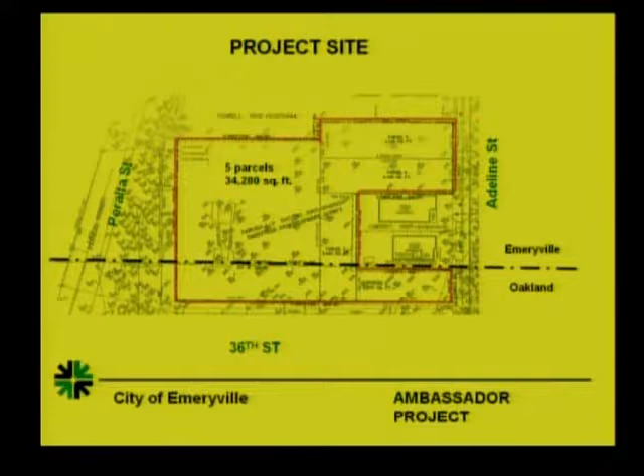This is going to be an affordable project, as in the earlier cases. This time it's 75 affordable rental units, more or less equally divided between 1, 2, and 3 bedrooms.

So the way the site has been designed is that the 3 parcels which stand by themselves, 2 on Adeline and the one at the corner, will have townhouse type units. They'll be 3 bedroom, so there'll be 5 of these right here. The major site...

...that was occupied by the former Ambassador building will be occupied by parking. Most of the site is going to be occupied by parking. They're also going to have lifts, so the entire parking will be accommodated at this level. The garage entries will be from 36th Street. The lobby to the project will be on Peralta, right here.

Along Peralta, these units, shown in blue, the applicant is looking for an option to make them live-work, flex space, or residential units. Right behind it, you have mechanical areas and equipment, and bike parking at this corner right here. There's also a small management office, as this is going to be a rental project.

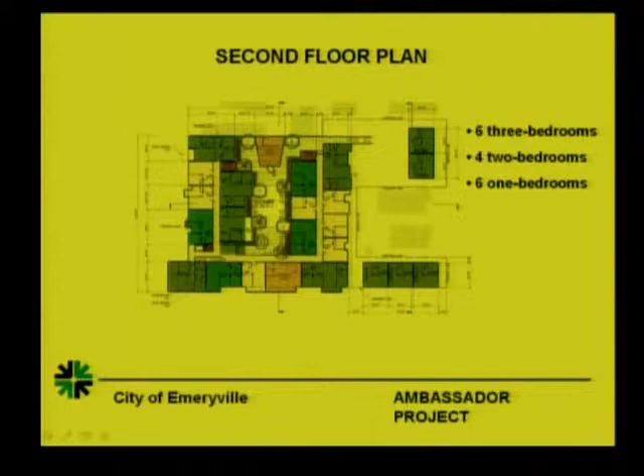So it's a podium kind of building. You have a U-shaped court around which the units surround it. Most of the units facing the court tend to be the larger ones, 3 bedrooms and some 2 bedrooms. There's also a community room here and an open space area right here as well. So it goes up to 4 levels, and all 3 mix of units occur at all the levels.

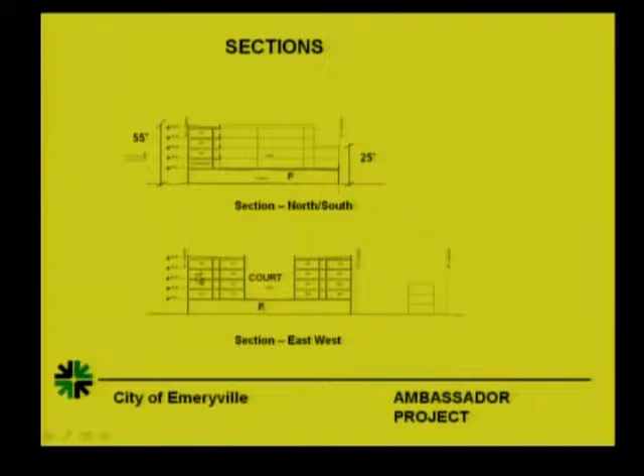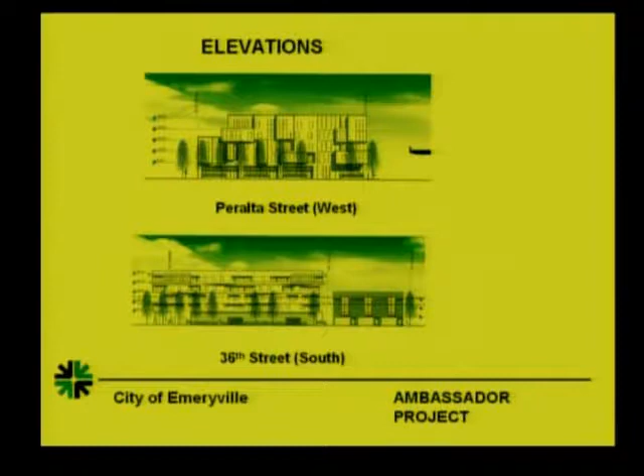This is the east-west section, you can see the court and the surrounding units. I'm going to quickly go through the elevations here, and let the applicant describe in detail. Since the submission of the plans, they've done a little bit of additional work in terms of materials and designs, colors, as well as the massing.

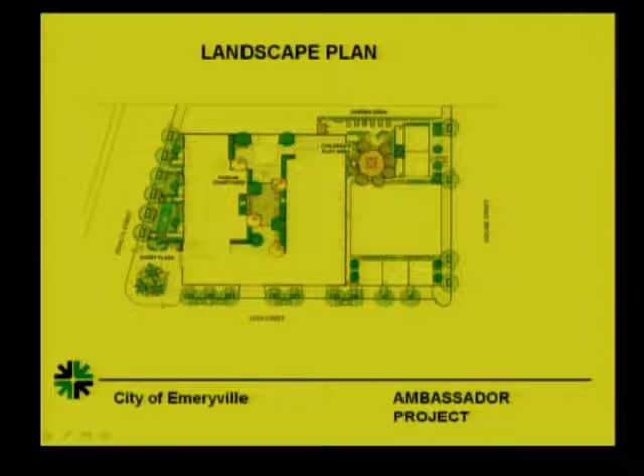In terms of conformity to zoning regulations, it is in the CG, General Commercial District, which has no prescribed density. The proposed density is 96 units per acre. To put this in perspective, Adeline Place, recently constructed, is at 120 units, and Andante is 63 units. Most of the city, under MU and IL district, has a density of 75 units per acre. The building height maximum is 40 feet, which can be increased to 55 feet with a use permit, and the highest portion of the proposed building is 55 feet.

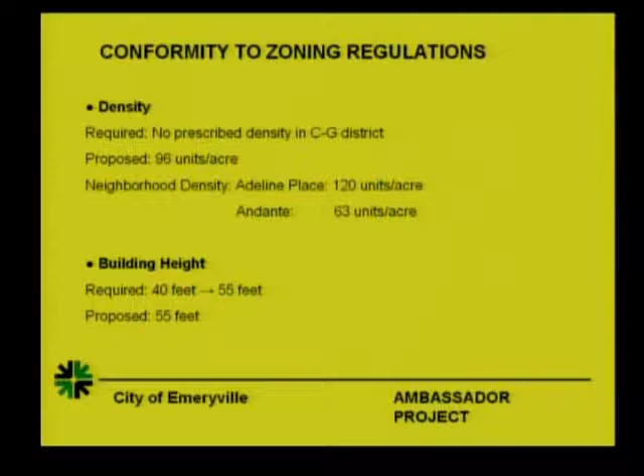In terms of parking, both resident and guest parking meet city requirements. What this project needs is a parking variance, which was also in earlier incarnations of this project. The reason is these garages along Adeline and along 36th back out into the street, and the zoning ordinance does not permit this for projects with more than 4 units, mainly because of potential hazards moving into oncoming traffic. Kimley Horn is preparing an updated traffic study for this project. They had done that in the earlier case, but they're updating it due to a slight difference in unit count, and will also look at the potential hazard from these garages.

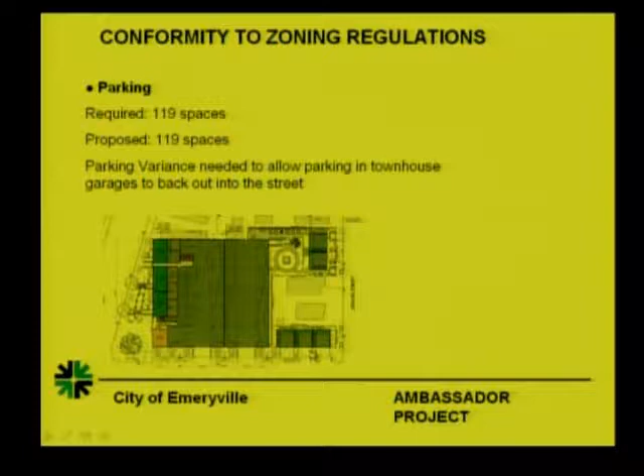We are hoping that this project will come to you before the new general plan is in effect. However, the project does comply with the density, height, and floor area proposed in the draft general plan.

I'd mentioned that this is an affordable project, and the affordability levels would be the rents, which are between 670 to 830 for 1 bedrooms, going up to 1100 for 2 bedrooms and 1160 for 3 bedrooms.

This was reviewed internally by staff, and the main comment was that the landscape area, the entry plaza, be designed as a community garden similar to the one existing across the street. This also came up in the community meeting. There was also a suggestion to include bulb outs on Peralta as well as West MacArthur to slow down traffic. The other recommendation is that the townhouses, particularly along Adeline Street, have a 1-car garage instead of 2 cars to minimize the driveway width, with the shortfall perhaps accommodated in the main garage.

The RCD held a community meeting last month on the 17th. About 10 people attended, including Councilmember Davis, and there were a lot of clarifications that members asked for. In terms of suggestions, they wanted to make sure there was some vertical landscaping, and they also felt there was a need for shadow studies so they could see the impacts of shadows on their properties.

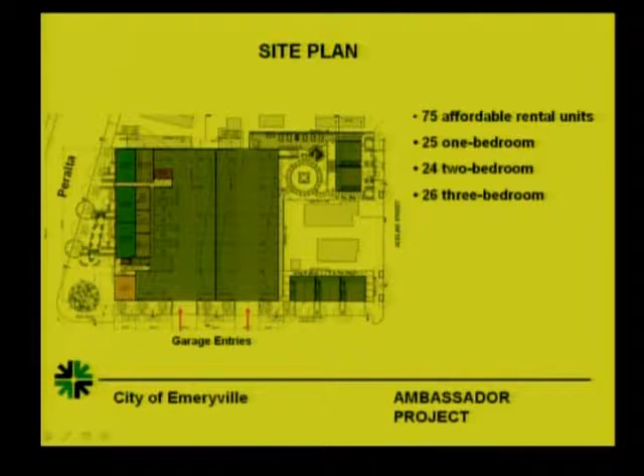If you look at drawing C4, the striping and overhead electrical plan, in the lower right-hand corner, the intersection of 36th and Adeline shows a right-hand turn lane that doesn't exist there today. Is that something that's part of all the changes?

There would be a right-hand turn lane here—no? I believe that was part of the Kimley Horn recommendation for the previous project. That, in conjunction with the bulb out, is intended to minimize conflicts between cars backing out onto 36th Street. So the right-hand lane would be right turn only onto Adeline, and if you want to go straight across 36th Street, you'd have to get in the left-hand lane, which puts you farther from those cars backing out of the driveways. That was the idea.

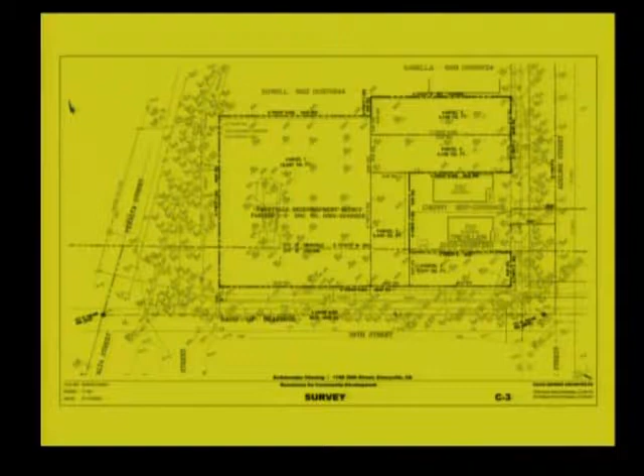Jay, actually I'd like to maybe introduce the luminaries in the audience. There's Jeff Miller, our landscape architect, with Kyla from his office.

Lieben, who's the project architect. I'm going to get in trouble for forgetting her name. Jay Connor from my office, and you met Lisa.

And obviously the freeway is a pretty constant presence on a lot of different levels. This gorgeous community garden has sprung up. We actually had some pictures of the first project that we did, and it was barely there. It was so much lower, and now it's come to life, and it's a beautiful asset to this project. There are some nice touches in that area and across the street, and we want to tap into this if we can as we go forward with the project.

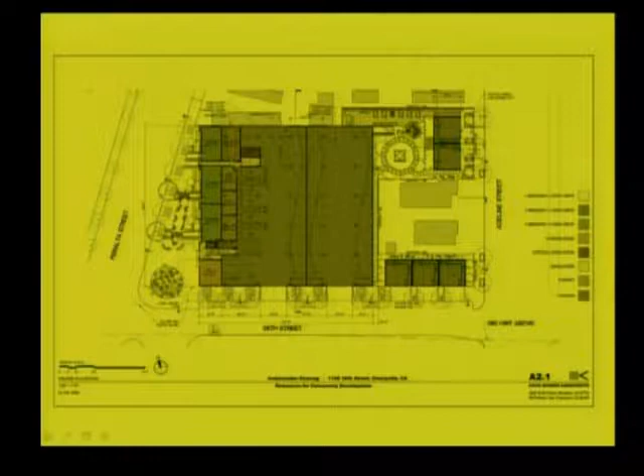Parking, as was mentioned, meets the requirement, and we've added a few uses in the frontage. This, I think, is a really nice idea too, that was brought up, and it has seemed to stick. It's going to be a nice little plaza in front of the front door of the place. People now come down 36th and kind of whip around this end, and they're going to have to go a little farther out, and that should help calm things a little bit.

Again, Jeff is here if you want more detail, and he could come up and talk to you about it. But the idea is to basically give a fairly dense green set of plantings - what I'd really like to see here, and I haven't really talked to Jeff about this, is what happened north of Old Chiron on Hollis, with the poplars so close to each other that they create a pretty tall green wall between the building and, in this case, the freeway.

The idea is to use a lot of the brick from the original building that got torn down. They're being stored somewhere - Charlie's got them in the back of his yard or somewhere. I think Amy has them. Amy has them? All right.

But the idea is to use them for pavers, both in the plaza area and in some other areas. You can see some of this striping, these taupe colors. This courtyard is about 40 feet wide by 120 feet long on average, so it's a very generous size courtyard. When we get to the sections, I'll point to a rule of thumb that this meets, which is a good thing.

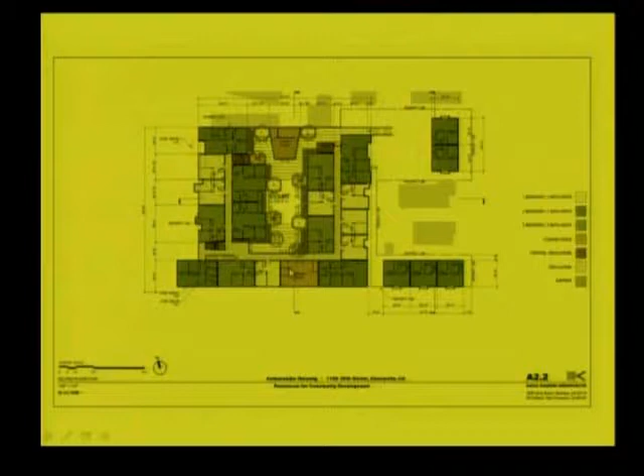Yeah, we think it's either going to be in this one or that one, but it's off the courtyard so people can easily go in and out. If there are any activities in these common areas, they could spill out into the open space of the courtyard. And one of those would include the laundry space? Yes.

As we go up the building, you can see it disappears on that end, and one idea is to lower it there so it becomes a better neighbor to the houses next to it. As I said, because there's no building here, this house will really benefit from it.

How tall is the building at that corner? When it comes down, it's actually around 30 feet. And how tall is the neighbor's building? About 18 to 20 feet. So it's twice as big. Third floor, and that's the top floor.

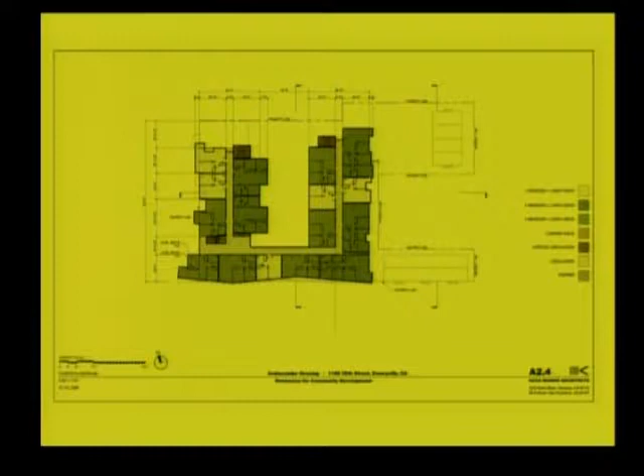This section illustrates the rule of thumb I wanted to mention: if the vertical height is about equal to this distance, you get a very useful, light, good sort of open space. And that's exactly what we have here — this is 40, which is again an average of 35 and 45. So it should work well.

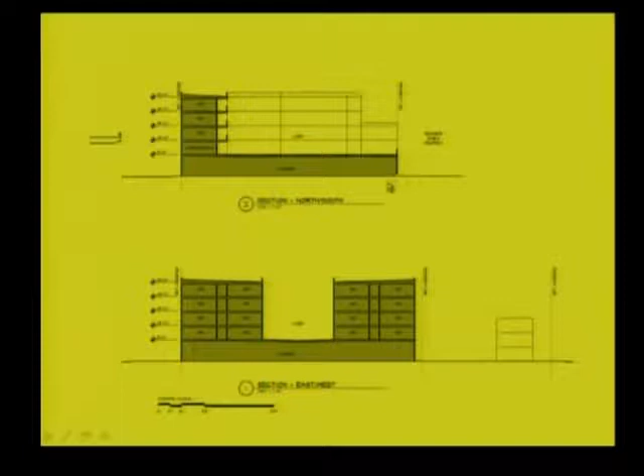This section is cut north-south, so you see the edge of the freeway. 36 is here, the building, and then you see how it steps down to come to a more compatible scale with the neighbor.

These are sections through the two fingers that come out to Adeline from the main portion, and these elevations are slightly different from what you were looking at before — we've since fixed them. The idea was for these buildings on this side to act as bookends to the bungalows, very compatible with them, with the roof shape giving a lot more of a residential feel and look.

These dashed lines are actually the top of the freeway, so you can see that all that will show up from the freeway side is the very top of this building and these couple of top floors.

The idea for this side of the building was to have a more horizontal composition, and because it faces south, there are quite a few sunscreens over the windows on all floors. There's also a slight undulation to each floor on those two top floors.

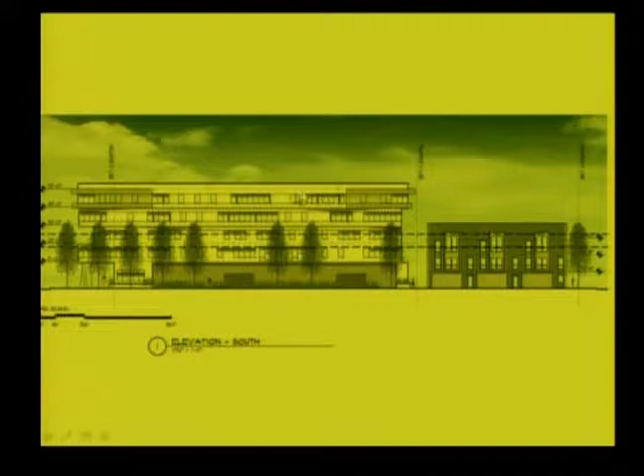So that from the freeway it'll have a bit of movement to it, and at night it should actually look pretty nice, if not all the time.

The west elevation is where the front door into the building is, here, and then a series of lobbies that go all the way up the building on each floor. The idea is to use some of the artists and artisans in the neighborhood to help design the gate, as far up the building as we can go.

There are two parts to this. One is things we're going to need for the building anyway, like some sort of grill work on the south side that just has to be built and designed — that's one thing we can collaborate with them on. But we're also required by code to provide a percentage of the construction cost for art, and that's another piece we could add on.

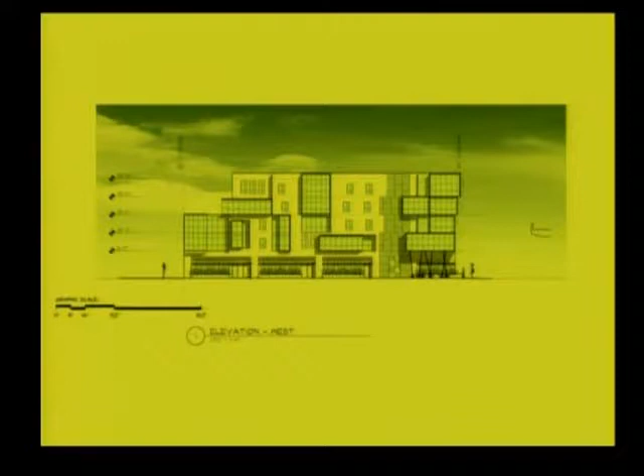This side is a lot more playful and has the three units, as I said, out here. I have some other images to show you.

So this is a building in Berkeley that has corrugated siding that, from a bit of a distance, looks a lot like shiplap siding, which is compatible with a lot of housing. This building in San Francisco has been winning every award on the planet these days - it's a material that's actually impregnated wood so that it doesn't age, get bleached, and look tired after a while. So that's one of the materials we're proposing to use.

And then this is Corten steel, which is something I've struggled with a little bit. We did a project down the street on Adeline where we used it, in a new sort of way. It could be interesting, but it could also reinforce the rustiness of the whole scene. So we're oscillating between using this material or that one to add some warmth, and that's where we are at the moment.

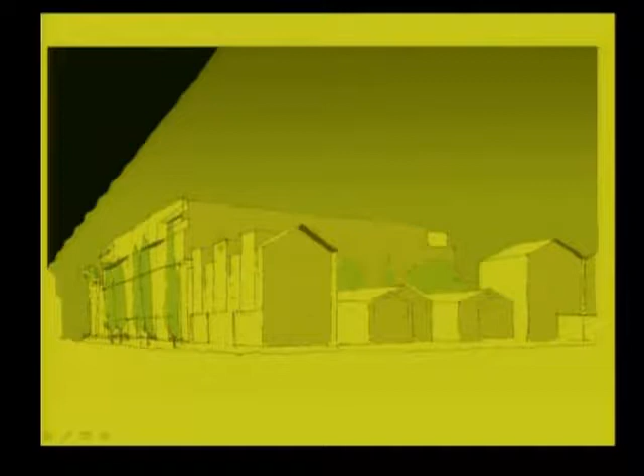So one of the views onto the site, and then the exact same view with the buildings. This is the 3-unit with the 2-unit back here and the bigger building in the background. And we have one thing you haven't seen, which is this drawing that shows a bit more atmosphere.

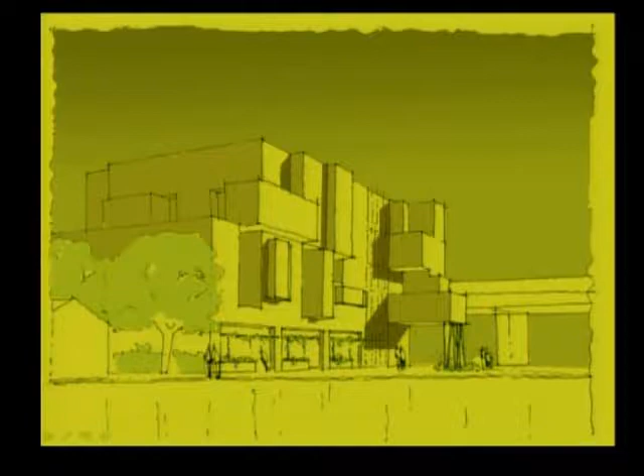We also took this view to show you a couple of views of the building. This was the study we drew to look at the massing of it, and then a more defined version.

So the Corten or that impregnated wood would be around these bays. So there would be one material - we're looking at maybe stucco as that material - and these bays would have that other material on them.

On the inside wall or the outer wall of the bay? Actually, we'd like to do both. The renderer who did this basically emailed it to us at 5:25 this afternoon, so we got it and were like, oh my God, he didn't put the color on the bays. But that's the idea.

Is that a balcony on the fourth level? Yeah, this large one. I see a door below. I'm not sure if balconies are a good idea in this spot. Yeah, I'm just trying to figure that out - that's not what you're showing there. That wasn't the idea. We've pulled that end of these bays out a little bit just to give the front door into the building some protection, because it'll likely help with the noise and so on.

You know, this plaza ought to be something really nice. And I think - do we have more? No, that's it. So that's in essence a bit of progress from what you had seen earlier.

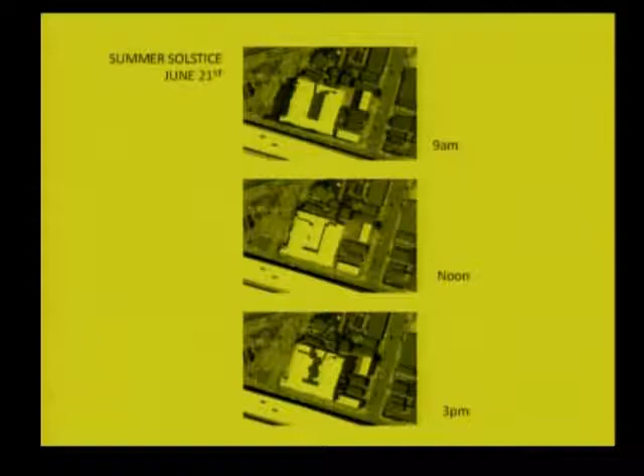Are you interested to know what they're made out of? Yeah, what kind of material? Well, I'm thinking that it should be something that is more or less gridded so that stuff can sit on it, because outside of just the noise coming from the freeway, there's quite a bit of stuff that comes out.

If it was just a ledge that caught everything and we weren't totally aware of detailing it properly, it could wash on the face of the building, and in no time, one rain, and it'll. So the idea is to have it keep the light from going into the units, but not hold the soot. And it also should cast a more interesting shadow on the face of the building than something solid, by seeing some sort of pattern.

It would be horizontal and offset from the building. It definitely would be horizontal, and it probably could only come out by... we actually did a quick shadow study in the office, and 1.5 or 2 will be sufficient.

And is there air conditioning in these units? No. Is there any kind of ventilation? Yes, ventilation which will be filtered. And it's not only something that we want to do, but I think by code we're going to be required to make sure that it's filtered. So there's going to be change of air, and there's a prevailing wind that is going to come from the west, so given the climate around here, it should work.

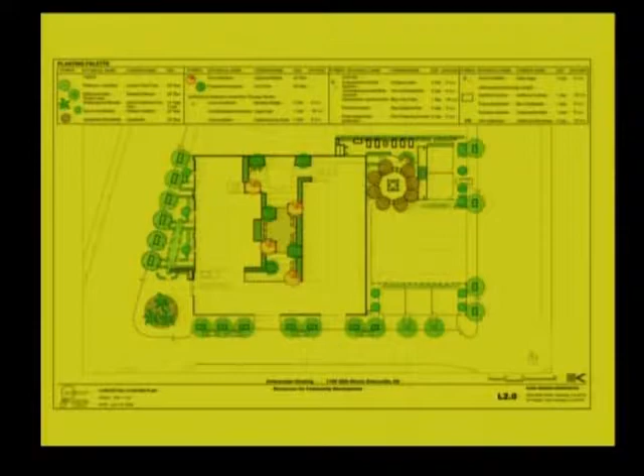So the planters you're seeing are really, a lot of it is in response to stormwater management issues. A lot of them, the ones in blue, are infiltration planters - if you're looking at L 1.0, the ones marked with the letter L in the courtyard are all representative of infiltration planters.

I'd like to take the opportunity to talk a little bit about that, because we did have a meeting with city staff over issues of stormwater management on the project, and we have what we think is really an exciting opportunity here - to channel a lot of this stormwater to the front of the building, incorporating it possibly into the facade when it rains, in a kind of rain fountain, and then into this front landscape that goes along Peralta Street. So we'd be handling a lot of the stormwater issues in that space north of the entry plaza. We think that's really an exciting opportunity and a way to incorporate some artful treatment of this stormwater issue for the project.

Generally speaking, those infiltration planters are going to be, what, 42 inches high? Right, they'll be the standard 42-inch high.

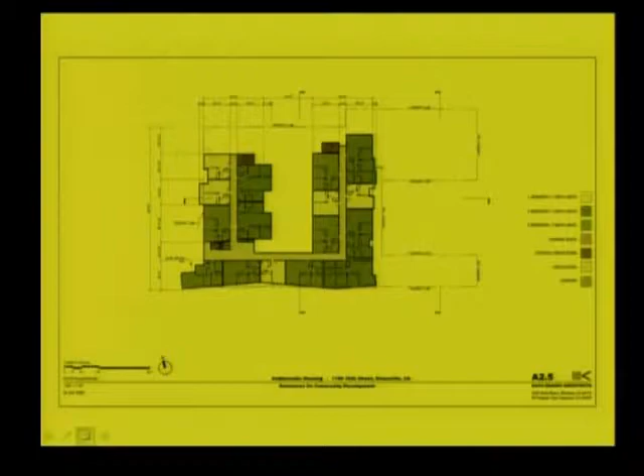Actually, what we're proposing is that Oakland vacate its portion of Magnolia Street, north of 36th Street. We vacate our portion of Magnolia, north of 36th Street, and then it all gets sold or somehow transferred to RCD and becomes part of the property.

So that wouldn't be overhanging the public right-of-way. It would be overhanging their property, the plaza would be on their property, good, except for the sidewalk, of course. And then they'd be responsible for maintaining it. Absolutely.

The other thing is, of course, all the street trees would have structural soil under them, and we'd be following all the Emeryville standards. We worked with Kava on the Age Song project and went through the whole process of the street trees there, so we're quite aware of what the standards are.

And can you talk about your rain wall a little bit more? Yeah, well, you can see it in the plan there in the front, and I think our thought is that we have a lot of water falling on the courtyard and on the roofs of the building, and oftentimes that's just channeled directly into the sewer system. But with all the stormwater management requirements, we need to filter that, and we need to do something with it.

So we feel the first step is having people understand that it's there. Part of what's happening with a lot of this water is it just gets disappeared - either it used to get disappeared into the sewer, or now it's getting disappeared into some sort of filter system somewhere. So we want to expose that water when it comes on the surface near the entry of the building as a feature. You may be aware of the project down the street here at 1500 Park with the big waterfall.

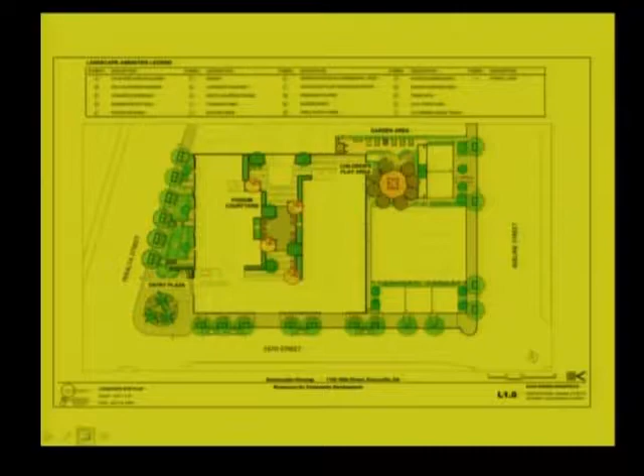But, yeah, I'd be interested - what is the concept, that the water would flow down the face of the building? Right, there'd be some sort of way to keep the water on the face of the building and then channel it into this area where it can be filtered and cleaned. And is the courtyard only one level up? But off the roof as well. Right, but it does come off the roof water as well.

So we have a lot of water coming off a lot of hard surface, and it seems like an opportunity to use it rather than kind of hide it away. I think it's a creative approach, but what were you envisioning in terms of the kind of material? Because the water's not going to be dropping down in a waterfall effect throughout the year, how is it going to look when there isn't any water coming down?

Well, it's going to have to be a kind of a surface treatment, and we're not sure what it is yet, but it would clearly be a treatment to the surface that will look good when it's dry and be brighter and more glistening when it's wet. It will be some sort of artful treatment of that shaft where the water will be directed.

At 1500 Park, it's a real sell for that building. However, over the years, we've had some challenges with it, and the homeowners have had to spend a lot of money dealing with the surface treatment pulling off, leakage, the pumps. Granted, it's different - it's not using rainwater, it's a fountain basically, a vertical fountain. It's lovely when it's working, but a lot of the time it's not working. So there are some concerns associated with something like that I would have if this was going to be introduced at this site, particularly since it's low-income housing and there are maintenance issues involved.

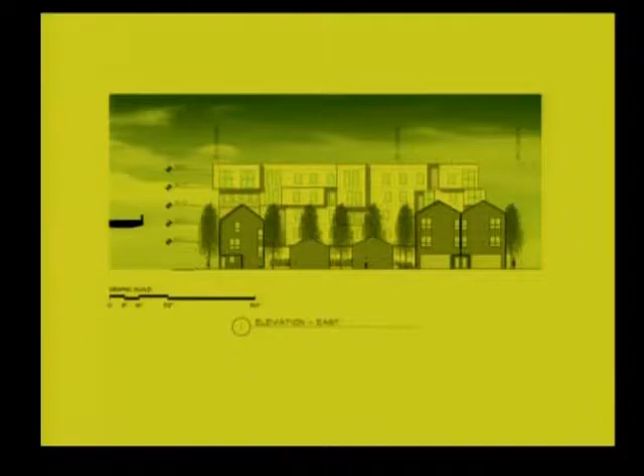And 30 feet on each side. I mean, those 2 houses are pretty exposed out there. The houses are very exposed, sitting there alone with the looming freeway nearby. I think in a way it's going to quiet things down for them a little bit. And again, architecturally we're doing our best to integrate the ones that are right up against them on the sides and the front.

And hopefully we can screen the back enough so that the taller building... They're only 5 feet from the property line, right? Yep, on each side, so it's 10 feet away. What's the distance between the corner building and the first house, do you know? It's around 15 feet. 50 feet? 15. 15, oh. Okay, all right, thank you.

Sure. If there are no more questions for the developer, is there any member of the public that would like to speak on this issue? No? Okay, now's your chance. We would welcome hearing from the neighbors. Please state your name and address. Yasmin Amer, 3605 Adeline.

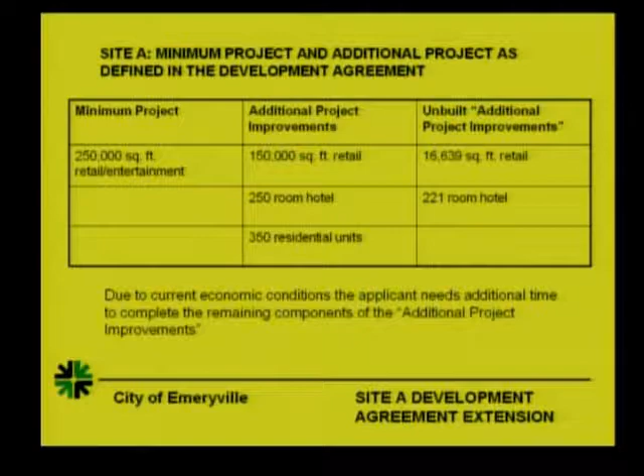But we're giving them 5 years and hope they'll do it in 5 years. Well, the development agreement simply locks in the entitlements, and they would only really need to get as far as getting their FDPs approved. They wouldn't have to complete the hotel necessarily. So they own the property?

Yes. So if we don't extend, then they have to come back with a new plan or something? They own that piece of property? Yes, they do. If you don't extend the development agreement, that does not take away their entitlements to the PUD, but the development agreement is a more firm commitment to the entitlements, and they would like that comfort level when they're talking to hotel operators.

So there isn't a hotel operator that's a serious consideration now in terms of at a negotiations point? I have not been informed. You may ask the applicant about that.

So if there were no more questions, the applicant is here. Well, I want to ask staff one more time. So is the blue area part of the original development area, development agreement area A? Yes, it is part of the original. There is an approved PUD for the blue area.

Here we go, this drawing. This is Site A that was approved in 1999. This is the hotel site. This is the portion of the retail. And out here is Site B, which used to have buildings, if you remember, a few years ago. Yes, the flower shop. I used to buy all my flowers there. I really miss that, it's not there anymore.

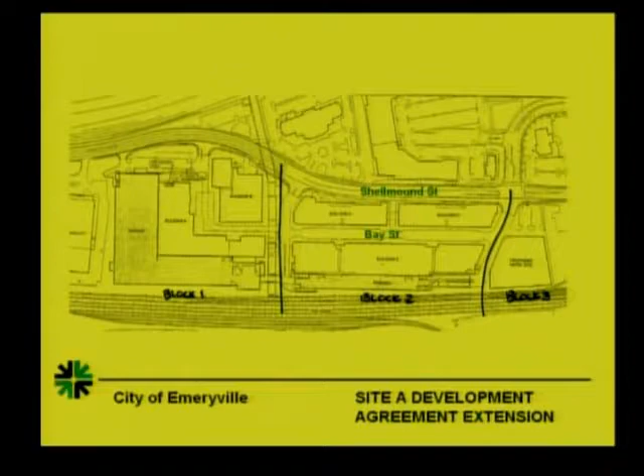So the Site B confusion that incorporated the hotel site from A, was that just a vague reference to Site B because it included part of Site A? It included the original, the great scheme we saw about Site B years ago. You had a big hotel. Right, that hotel was bigger than the entitled hotel, so what was in front of you was approving a portion of the hotel because 221 rooms were already approved.

And then we were going to have it as a whole, as a PUD. That's why we were calling it Site B. So they had always had the entitlement of the 221 room hotel and that little bit of retail, and anything additional, including a larger hotel, would be under your consideration. That's what we were considering at that point in time. Correct, it was much taller and incorporated the residential, condominiums.

If at the end of 5 years, nothing is built on this property, they still own the land, they still have an approved PUD. Correct. But their entitlement is gone, and they would... No, no, they still have the entitlement. The development agreement just locks it in a little more firmly. The development agreement, I believe, would prevent the city from rezoning that property to some other designation than PUD during that period.

So what's the purpose of what we're doing? To lock it in, so that Madison doesn't sell the entitlements for Madison Marquette and have some other developer come and propose a hotel and retail. Because if there's no development and the entitlements remain, it's possible for Madison to sell this property along with the entitlements, and another developer might seek an FDP for the entitled hotel and retail. They can still do that. I think it protects the developer from the city rezoning the property to something other than the current PUD approval.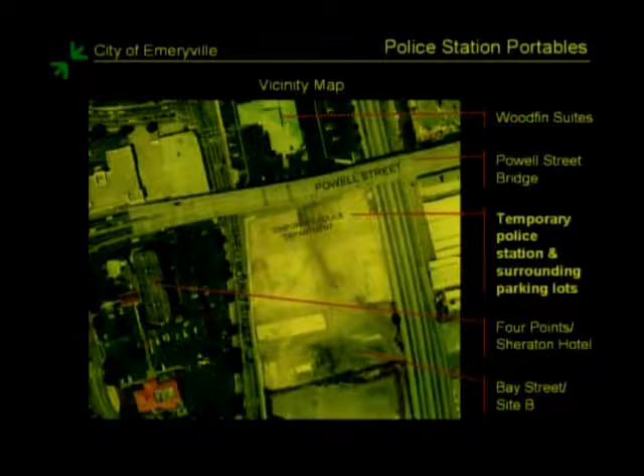This is an aerial map of the area. The cross hatches represent the site of the temporary police station. You can see the Woodfin Suites as well as the Sheraton Hotel nearby. Site B continues to the south, and the Powell Street Bridge is to the north.

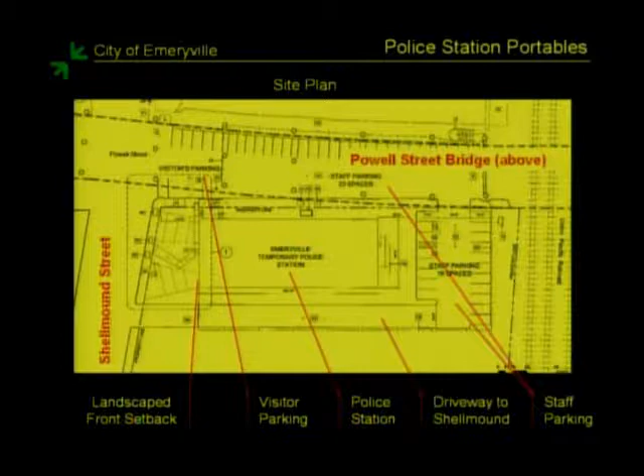We have some landscaping on the left, fronting on Shellmound. There's a small area for visitor parking, along Shellmound under the Powell Street Bridge. After that, there's a gate separating visitor from staff parking. Staff parking continues until the Powell Street Bridge wall, but also wraps around the rear of the portable area. Below the building, there's a driveway out to Shellmound for ease of access. The parking shown here is 7 visitor parking spaces, including 1 handicap space.

There are also 3 bike parking spaces, represented just below the visitor parking area, marked with the number 20. This is where the bike parking would be, very close to the stairs going up to the front door. Within staff parking, there are 23 spaces under the Powell Street Bridge, as well as 19 spaces behind the building.

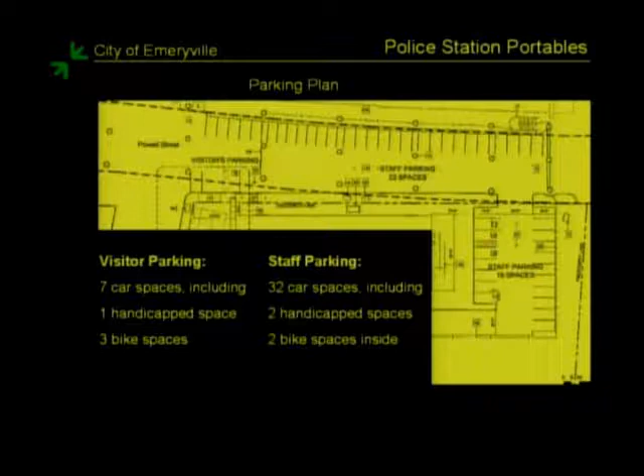Let me correct my number in the staff report. I had not added in the 19 spaces. In my staff report, I said there were 32, but they're actually 42, so that should bump it up. There are also 2 bike parking spaces within the building adjacent to the rear door, in a small room where at least 2 spaces will fit. So total, it's 42 spaces.

This is the landscape plan along the front of the building with Shellmound Street at the bottom. This is the plan proposed at the time of the staff report. It shows a poured concrete ramp sloping up to the height of the portables, which sit about 3.5 feet above ground level on a foundation. Then there's a walkway at door level of the portables with stairs descending towards the visitor parking lot.

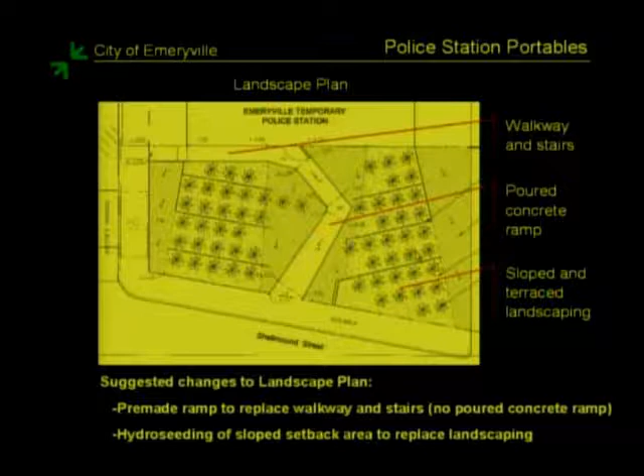This would be sloped, with terraces and landscaping with ground cover. It was noted in our internal staff meeting that it might be wiser to save money on landscaping since this is a temporary site. So it was suggested that a ready-made ramp, similar to ones commonly seen with portables, be placed here instead of the walkway and stairs, possibly keeping the walkway with stairs but adding a ramp to Shellmound. The sloped dirt area could be hydro-seeded with wildflowers, for example. These were suggestions to save money.

So nothing very exciting here. These are portables, and these show the elevations. This would be the west elevation facing Shellmound with the front door, and then the rear door facing the railroad tracks. This window, I believe, goes onto the interior bike parking room.

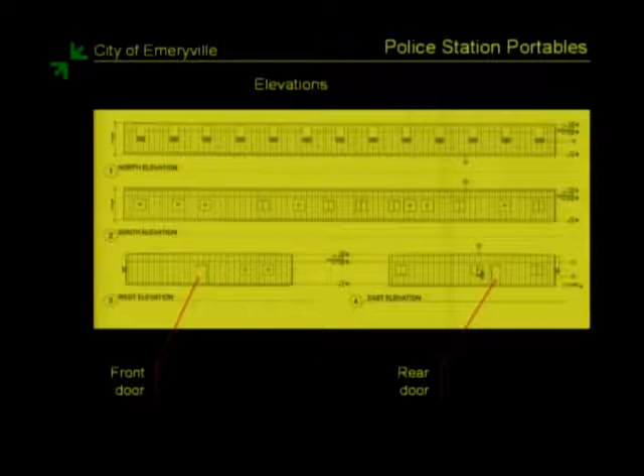A monument sign is proposed. If this is Shellmound here and the building sits here, this is the proposed location of the monument sign. This is what it would look like, and it would have two faces, facing both north and south.

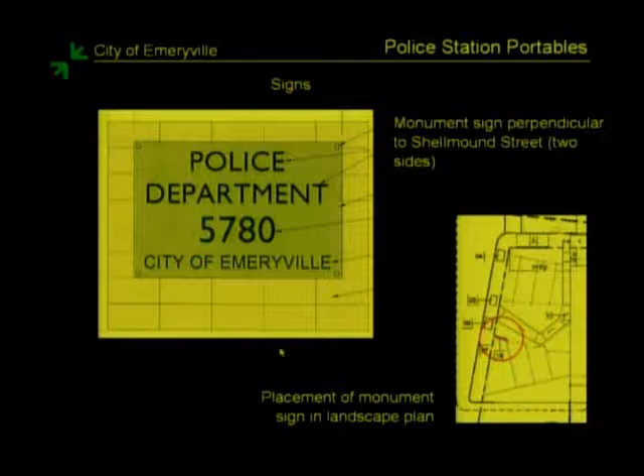As far as conformity with standards, the safety services use requires a conditional use permit, which is what it's before you for now. The parking proposed is 42, and all that's required is 23, given the square footage. This was calculated given 3 per 1,000 square feet, recommended by the planning director, as there's no specified parking requirement for this use. For bike parking, 2 spaces are required for both interior and exterior; 3 are provided exterior, which is short term, and at least 2 in the interior bike parking room.

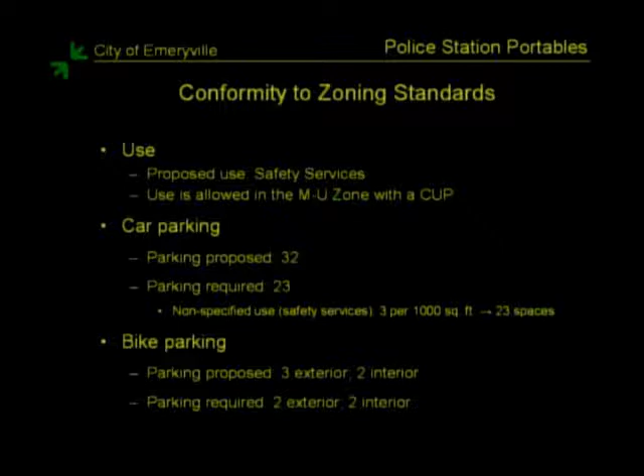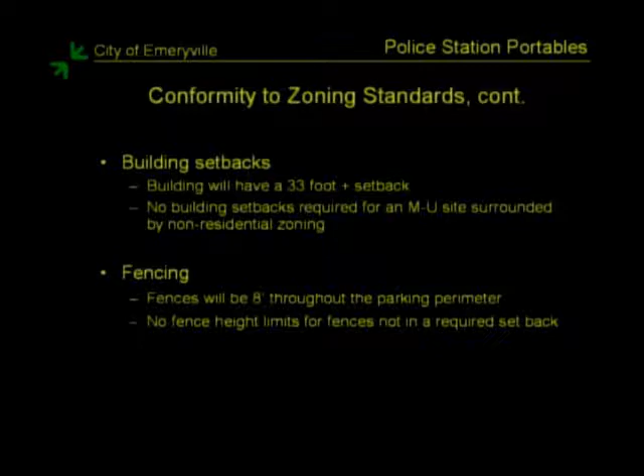No building setbacks are required. The building will have a front setback of 33 plus feet—33 feet, 2.5 inches at the minimum—and since Shellmound is at an angle, it becomes greater as that goes wider. The fencing around the perimeter of the parking will be 8 feet throughout, and there are no fence height requirements in this area.

So this concludes my presentation. Staff recommends approval of the conditional use permit and design review, subject to the conditions that were attached. One change suggested is that 24 months be allowed for the conditional use permit as opposed to the 18 months originally proposed in the staff report.

In talking to the police department as well as Public Works, it sounds like this greater time period would allow for a little more padding as far as setting up the portable, moving in, and then having the renovations done on the existing police station. In addition, I'm not sure if you have the handout—you should have an amendment to conditions of approval with you, containing two possible additions to the conditions of approval in relation to the landscaping and the possible alternative plan. These have to do with the ramp as well as the hydro seeding, should you decide to vote that way.

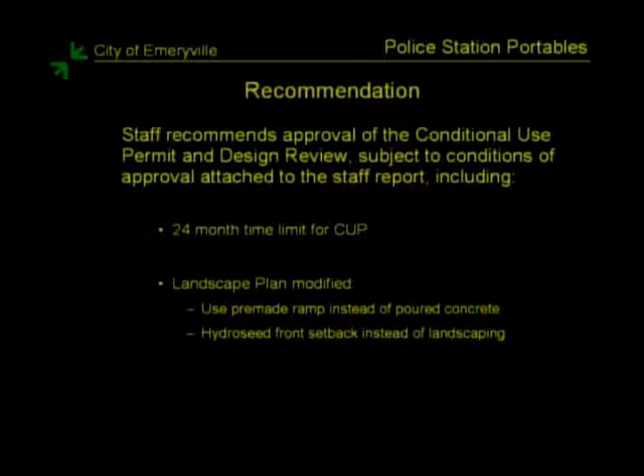So when do you anticipate that this would start? When are they trying to begin this process? Well, I believe the process would begin as soon as it was approved. I don't know exactly how long the construction would take. We have the architect here as well as a representative from Public Works and the police department who can answer your questions.

Hi, I'm Margaret O'Brien with the Public Works Department. The renovation of the existing police station is scheduled to take 12 months. We're scheduled for occupancy of the portables at the end of March of next year, and we're planning to move back into the police station early May of 2011. We don't know what's under the police station once we start the renovations, which is why we'd rather have 24 months instead of the original 18 months.

How long do you have on your schedule for constructing the portables? Portables take about 3 months to construct, and the site plan—actually from when they get the notice to proceed until they turn over the—can you introduce yourself, please? My name is Don Domer, architect. So from the time they get a notice to proceed until the portables are occupied was about 5 months.

And in between that, we'll do the site development on a separate contract. Is the fence on the north side next to the hotel going to be a solid fence? It's going to be 8-foot galvanized chain link, and we were going to put slats in for privacy. So that would be the approach on all 3 sides.

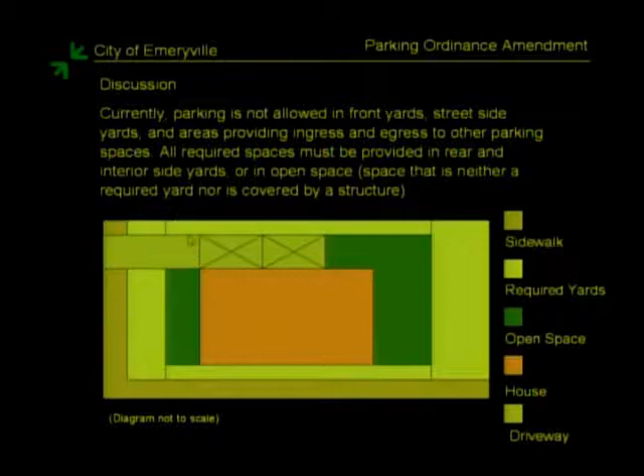In your example, these 2 parking spaces are outside, uncovered. But they could just as well have a roof over them, or have been underneath the building. My question is, is this a little unduly restrictive?

Let's say I'm rather affluent and I have 3 cars, and I have 2 cars parked under the building, and I'd like to put another car out here, and it's well landscaped and doesn't look bad. Under your proposal, I could not have a 3rd car on my lot. Isn't that unduly restrictive?

That's what we're here to discuss. Can't we make it subject to, say, staff review that it's not a blighting influence? Why are we doing this?

This came from the Community Preservation Committee. It's a concern that this committee has had for several years, asking staff to do something about the blighting influence of cars parked on front lawns and tucked in the sides between fences and houses in residential neighborhoods of Emeryville. We've been directed by the Community Preservation Committee to come up with a zoning ordinance amendment that puts tighter restrictions on where people can park outside.

Now, one thing I would like to note is that it's a little bit nuanced. The restriction here applies to open space and yard areas. What we're saying is you can't have more than the required number of parking spaces in your open space and yard area. Otherwise, people could park 5, 6 cars there.